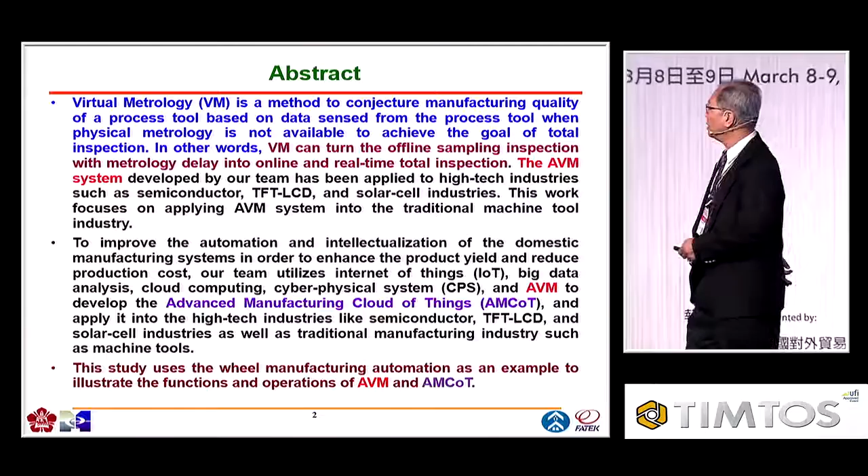I'll show you what I call Industry 4.1, not just 4.0, because we emphasize not only increasing productivity, but also quality. I will show this later. This study uses wheel manufacturing automation as an example to illustrate the functions and operations of AVM and AMCOT. So what is virtual metrology?

From this picture, we can show that VM is a method to conjecture manufacturing quality of a process tool based on data sensed from the process tools, without physical metrology operation. Why do I say so? When we have machine tools and try to machine a workpiece, after finishing the machining, if we would like to know the quality of this workpiece, conventionally we need to ship it to off-machine metrology equipment, for example CMM equipment, to try to measure it.

But this kind of measurement is very time tedious, it takes a lot of time. So conventionally we can only use sampling inspection. Not only sampling inspection, but also metrology delay, because after finishing the machining you need to ship it to the measurement equipment, and the measurement itself still takes time. So this is what we call sampling inspection with metrology delay, and this is not desirable.

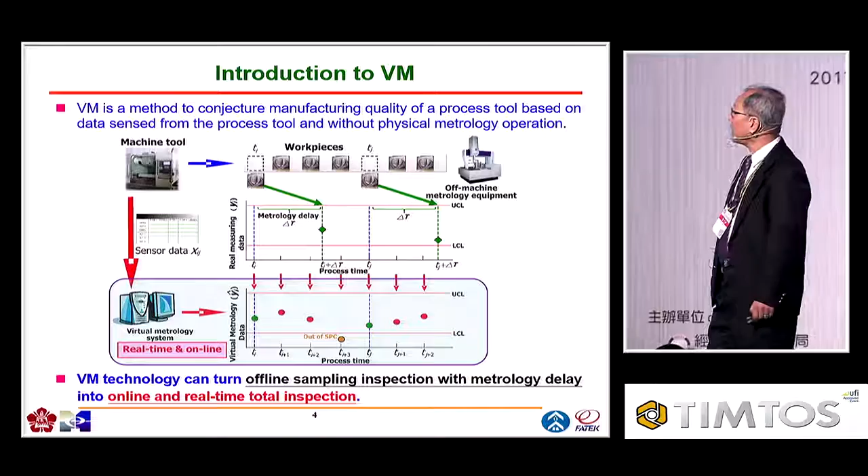Allow me to show you the AVM system. I had this kind of demo 4 years ago, almost 5. We had this demo at, for example, TSMC and UMC, etc. But for the semiconductor industry, they wouldn't allow me to take a picture or even video of that. But the CNC machine industry, they allowed me to do so.

So about 4 or 5 years ago, I showed this at the 2012 Taiwan International Machine Tool Exhibition in Taichung and also in Taipei. So what I really would like to show is the concept of AVM.

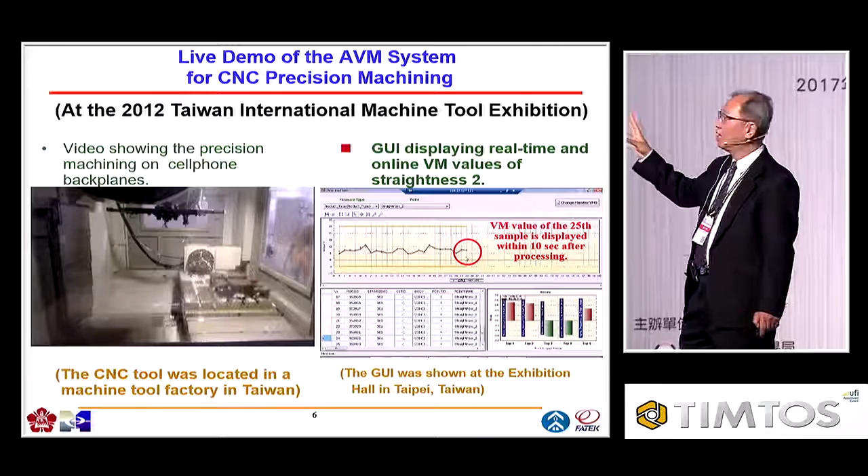So this is the concept of virtual metrology. Actually, this is the very first demonstration around the world of how to demo the virtual metrology technology here. So what is the AVM technology?

Let me show you the traditional VM scheme. What I mentioned is that we need process data. In semiconductor manufacturing, the production equipment has all kinds of sensors, and they already collect all that data in a database. So we can collect all those sensor data from the database easily.

But for CNC machines, most don't have sensors installed yet. Of course, we can install them ourselves. So we have a cooperation with FEMCO, and right now their product always has all the necessary sensors embedded in it. So we can collect the sensor data from the equipment.

Using this process data, if we have virtual metrology models here, then we can get the prediction easily. But we still need this kind of metrology data, the sampling output, because this sampling data is only for training and tuning.

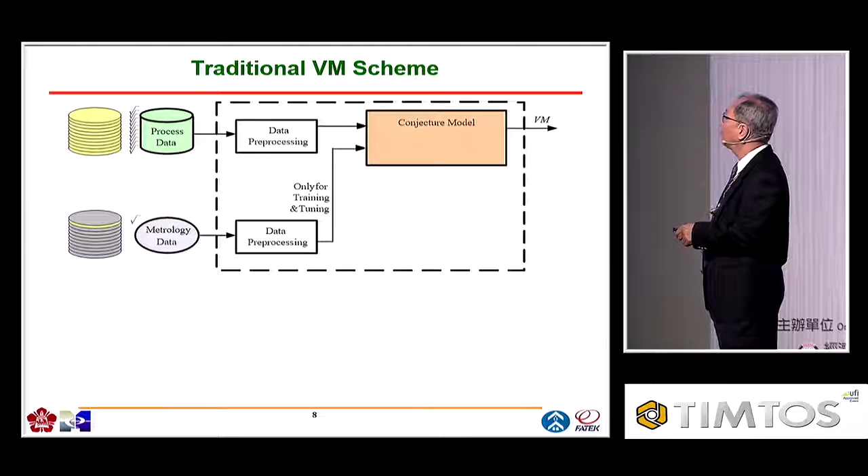Because the equipment itself is a time-varying system, you need to know the status of your equipment. So we still need some kind of sampling metrology data for tuning and training. But this is the basic requirement.

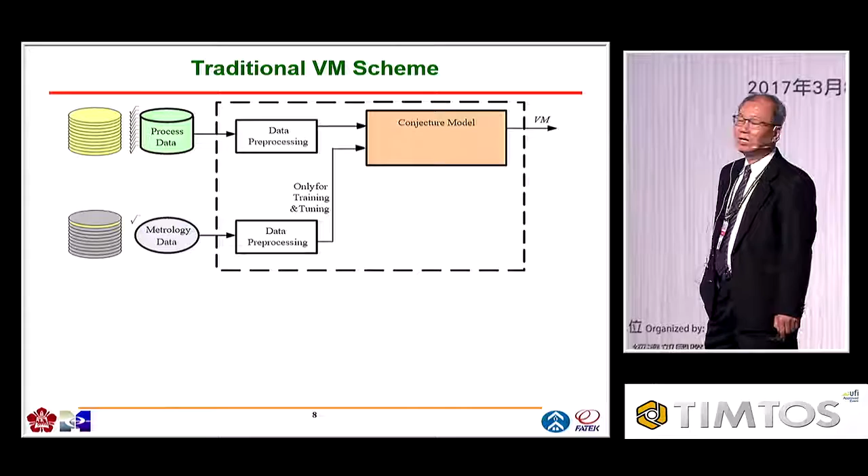Anyhow, this kind of algorithm was proposed about 10 years ago, but no one could really use it. Why? Because first, this is some kind of prediction, but they don't give you any kind of reliance index, so you don't know how good it is. So they are hesitating to use it.

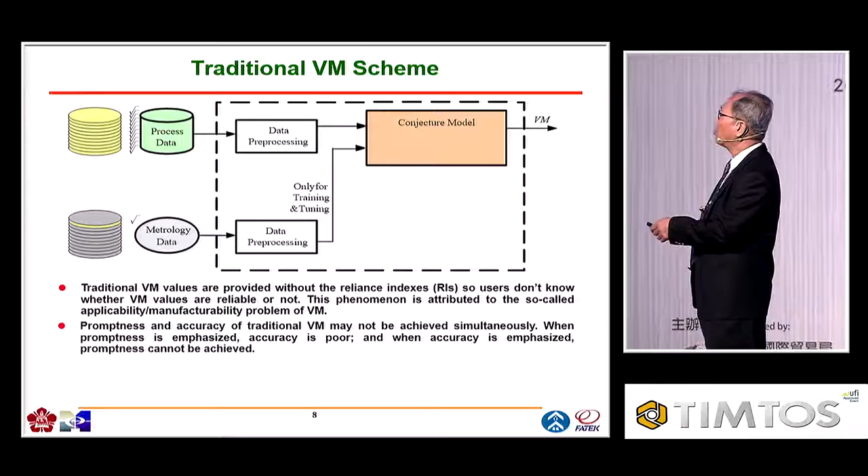The second question is, as we already told you, what we try to have in virtual metrology, we need to consider promptness and accuracy. For promptness, after we collect all the process data, we can predict it within about 10 seconds.

But because the equipment itself is a time-varying system, if the equipment state has changed, you need to refresh the model. So this kind of accuracy, we need to take care of also. Those two things conflict with each other, and we need to take care of promptness and accuracy simultaneously. This is another big problem.

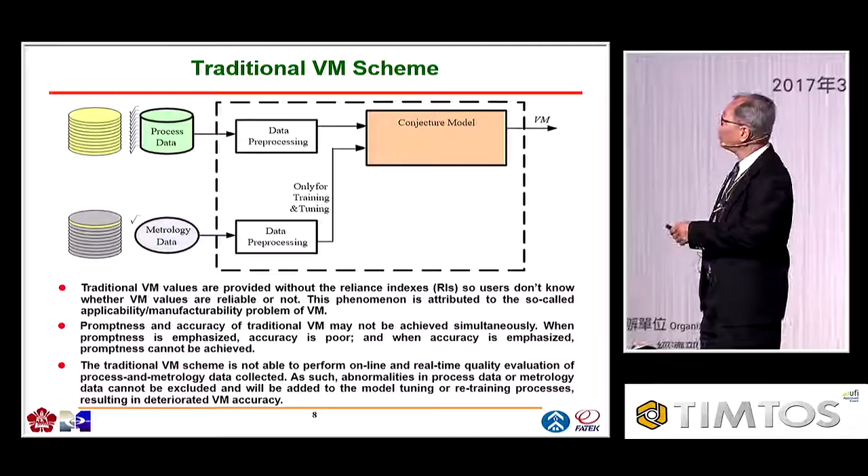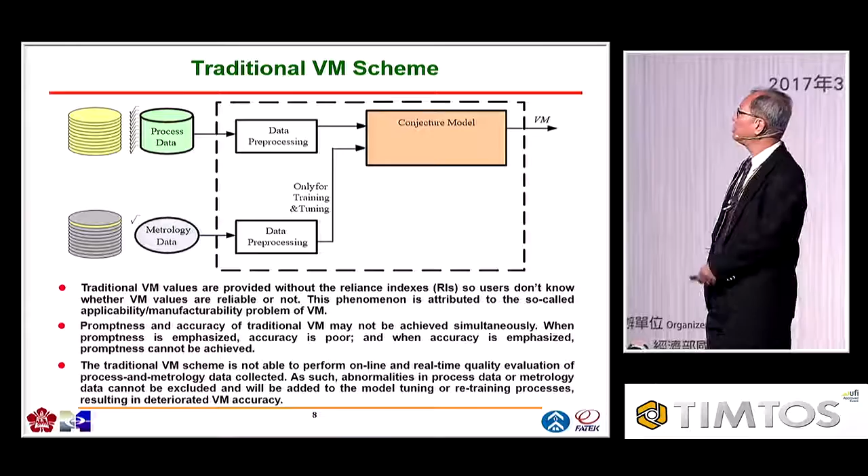And others—in the traditional VM scheme, when we do this kind of data mining or big data analysis, the data quality itself is very important. But traditionally, they didn't know how to do the data quality check in real time. So that is another big issue we need to take care of.

So what I propose is this algorithm that I invented. To begin with, we generate an accompanying reliance index and global similarity index, so that we not only provide the virtual metrology value but also the reliance index. So you know how good it is, and users can use it with confidence.

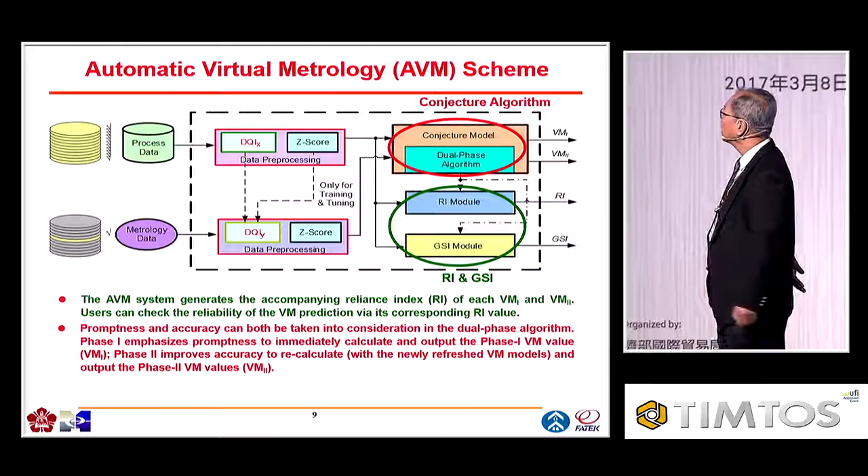The second one is a dual phase algorithm, so promptness and accuracy can both be taken care of. Phase one emphasizes promptness, and phase two improves accuracy. The last one is data quality evaluation, so the AVM system can evaluate the quality of the process and metrology data online and in real time, so the output of the VM value can be further assured.

So not only those features, but also we can check here. This red dot is the actual metrology, and we have two prediction algorithms.

The black curve is the neural networks, and the blue one is PLS. You see, if those two are about the same, we have confidence in all the results.

But for this point, what I told you about the reliance index, we just check that there is an abnormality detected online. Then an alarm can be sent too. So this is one of the advantages of AVM, in addition to total inspection.

In other words, when the system is smooth, when the machine itself is very stable, then the accuracy is about the same as what you really get using real metrology. But when the machine itself has something wrong, we can still detect it.

The prediction here is no good, don't use it. Actually, this is the real situation of what I demoed in the picture. And why do we have this kind of situation?

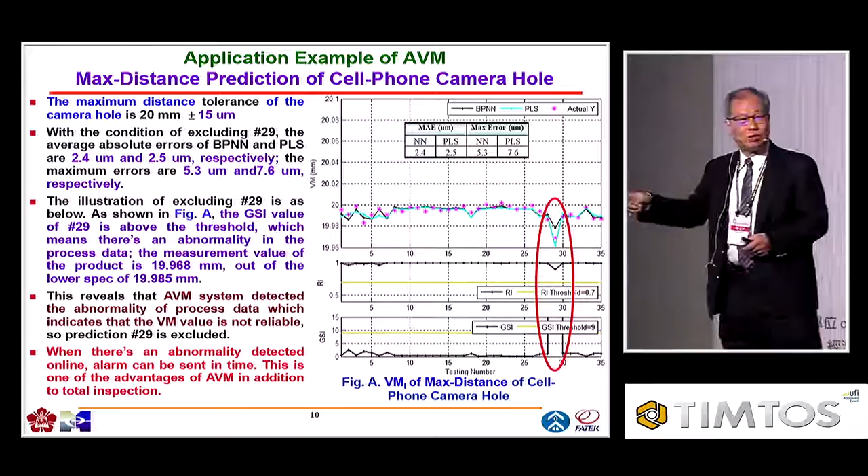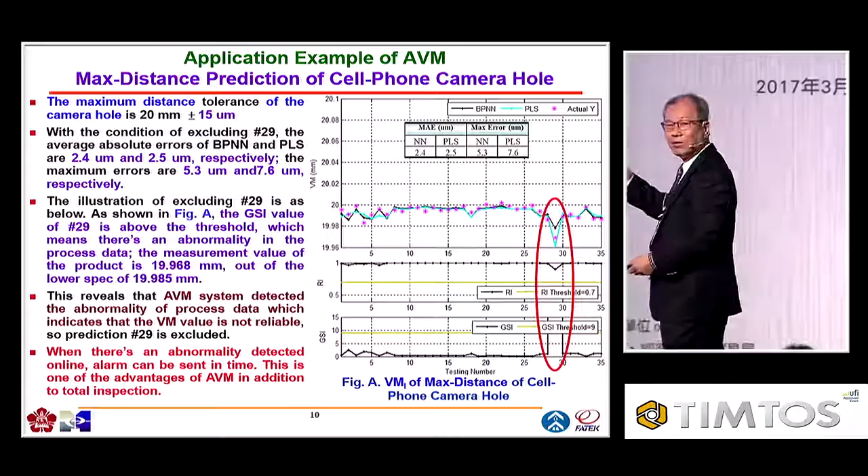Because when you clamp it, when you use a fixture to fix it for machining, at that time the fixture is not very fixed. There's something wrong there, so the vibration signal is different. So we can detect this kind of signal and see that this prediction is no good.

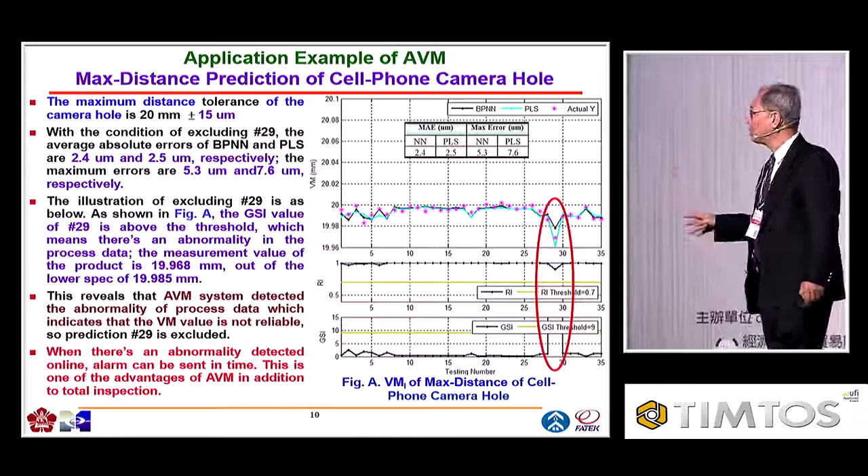Actually, when we really go to real metrology, you see we have a difference there. So this is one of the features that the AVM system has.

So we give you the example for FEMCO and FATEK. What I show you here, you can see the real demo this afternoon. You can go to the booth at 3:30 and see everything. But I just try to present what we will show in the afternoon here.

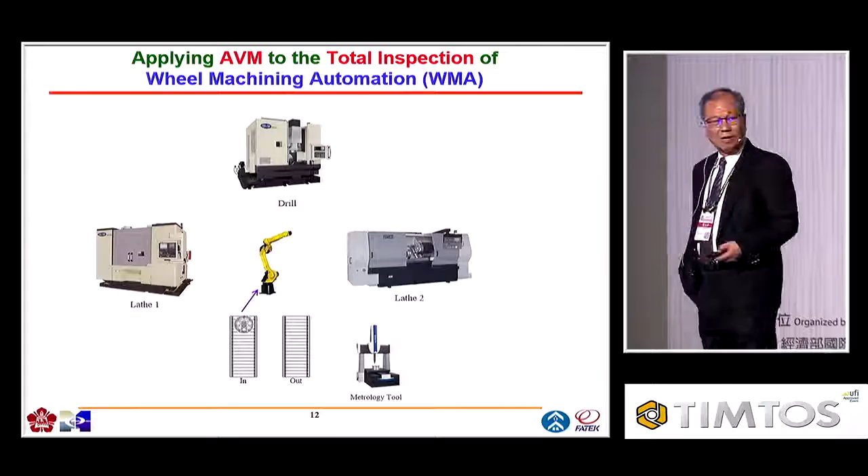For this turnkey solution, this wheel machining automation, we have two lathes and one drill machine. Conventionally, when we have a wheel, we bring it to the lathe for machining one side. Because the central hole diameter is a critical dimension, we need total inspection of that. Then we machine the other side and drill the holes, or something like that.

After that, we finish the operation. But we have so many quality items that need to be inspected, and here they can only measure the central hole. If you would like to know all the quality values, you need to ship this to a CMM machine for measurement.

And of course that is offline, and we have a metrology delay. We can only do sampling inspection, not total inspection. If we would really like to have total inspection of all of them in real time, how can we do it? This is the way to do it.

We need to install sensors, such as accelerometer, current sensor, etc. Then we collect all of the data through an IoT device called GED. This data is fed into the AVM system, which can conjecture all of the quality values in real time. I'll show you later.

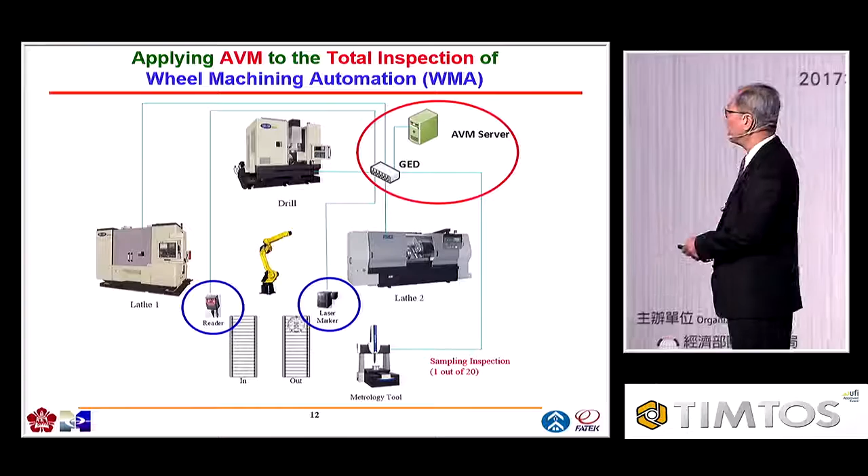For Industry 4.0, in order for this kind of system to work, we need to have a work-in-process tracking also. So we need a laser marker to mark an ID or QR code on the wheel, and we have a reader to read the ID. And we still need measurement equipment for sampling values, for tuning the model.

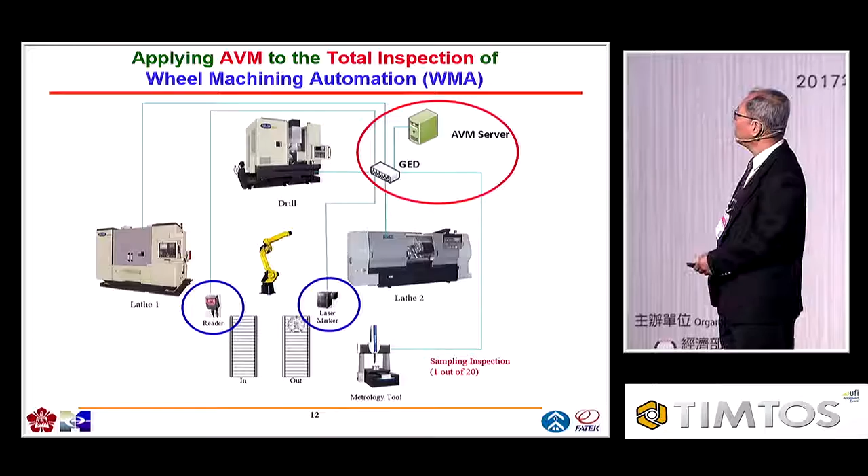For the block diagram, this is the machine itself. We will install the sensors on it, and we still collect the necessary data from the controller also. This is the data collection device.

Actually, this is one kind of IoT device. They collect not only the process data but also the metrology data, and then feed it into the AVM server.

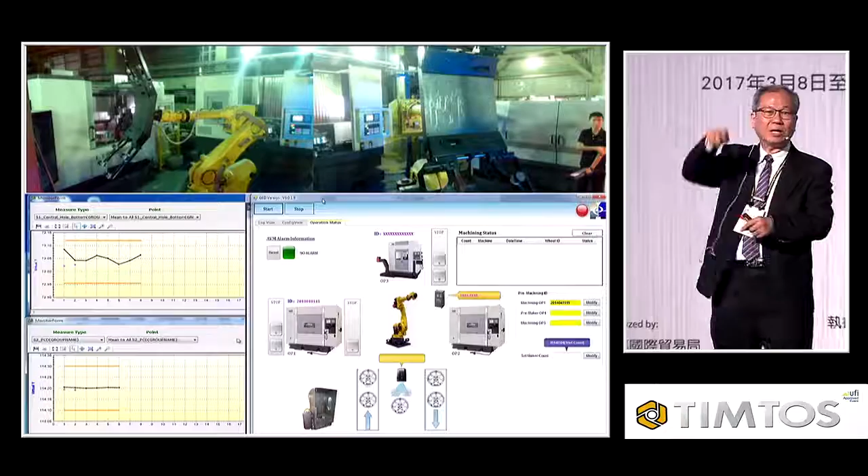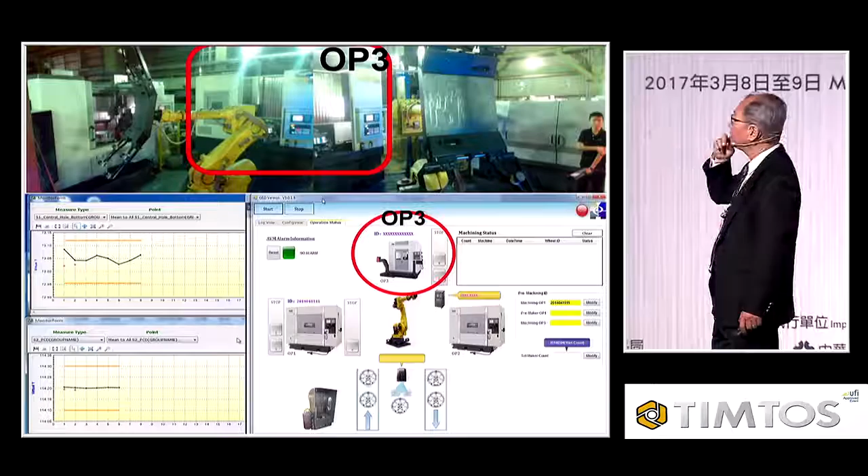This film was taken two years ago in Jiayi, but the whole turnkey set has been shipped to Nangang. You can see all the operations in the afternoon. We have OP1, that is this machine, and OP3 - I will demo those two - that is the drill machine. We have a Fanuc robot, and we will show you the VM result.

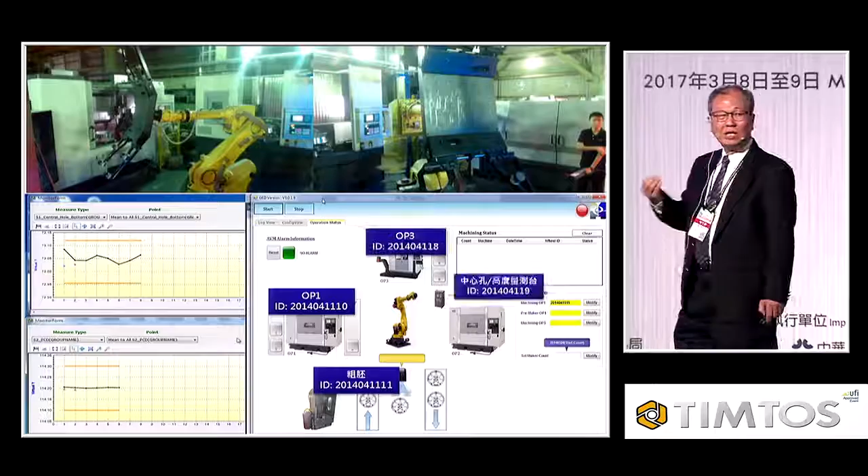So this is the GED client. We need to do tracking, so you see we have, for example, this number 7, 8, 9, 10, etc. So we will show you.

Okay, no sound. I need sound.

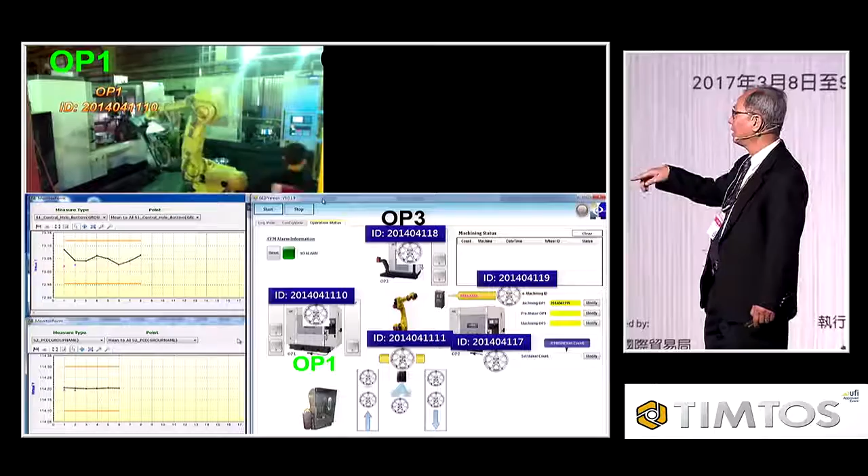Oh yeah, okay, so you see, so because they need to clean it. So after cleaning, then he will put number 11 into the machine, the OP1.

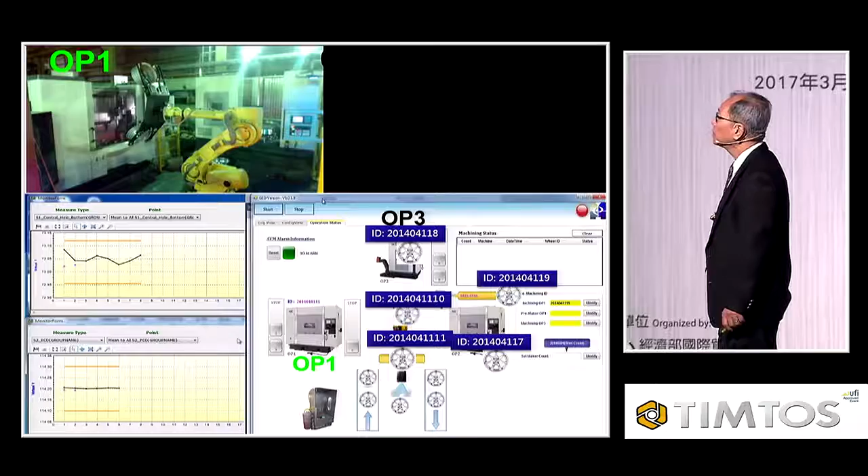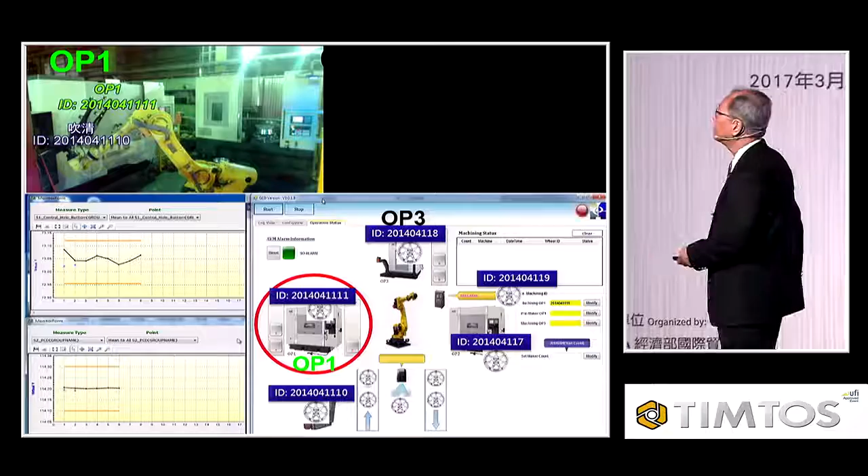Okay, so when you put OP1 in, when he closes the door, the drill machine starts operating. And you see, okay, so it starts operation. And you see, this tries to collect all the data.

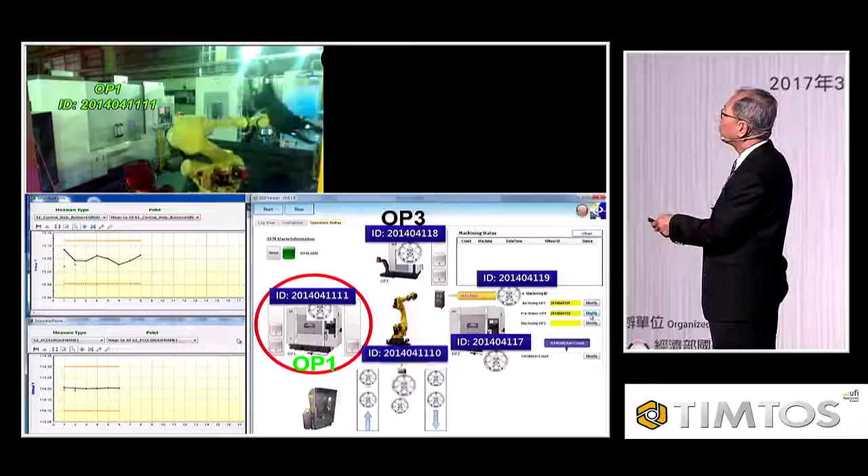But after finishing the first operation, then he needs to use the laser marker to mark it. So you see, so that we have a laser ID there. But when we show you that after finishing the machining here, actually we have 3 quality items shown: central hole, outer diameter, and flatness.

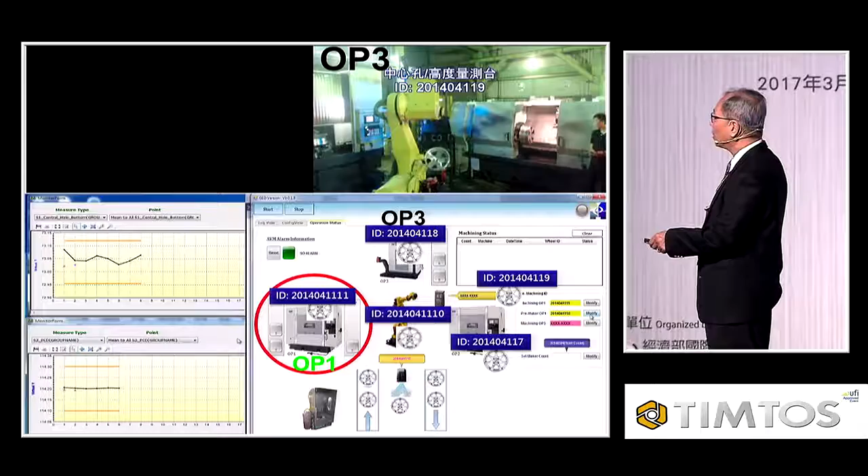After finishing this one, we will show you that he will predict the output. Would you please turn the volume a little bit down? Okay, so not only the OP1, but also OP3 and OP2 too.

And because we have the ID already, before entering the machine, we need to identify which wheel has been shipped to the CNC tools for machining. So you see, be careful here. It's about done. After finishing this one, we can predict the value here.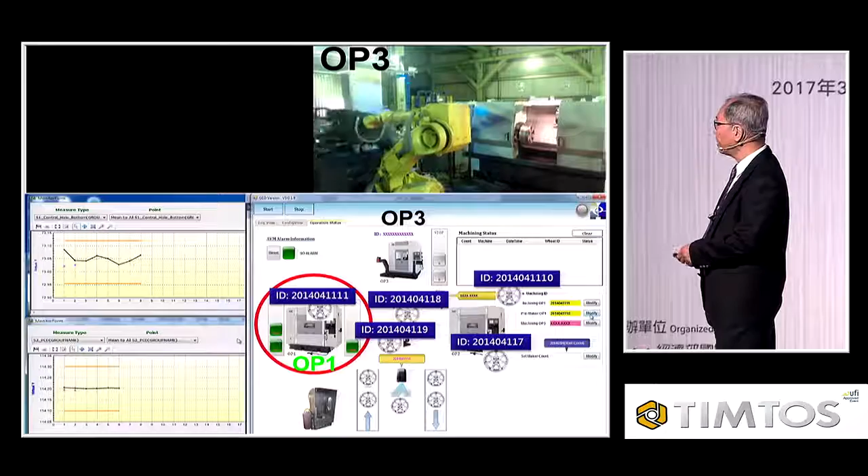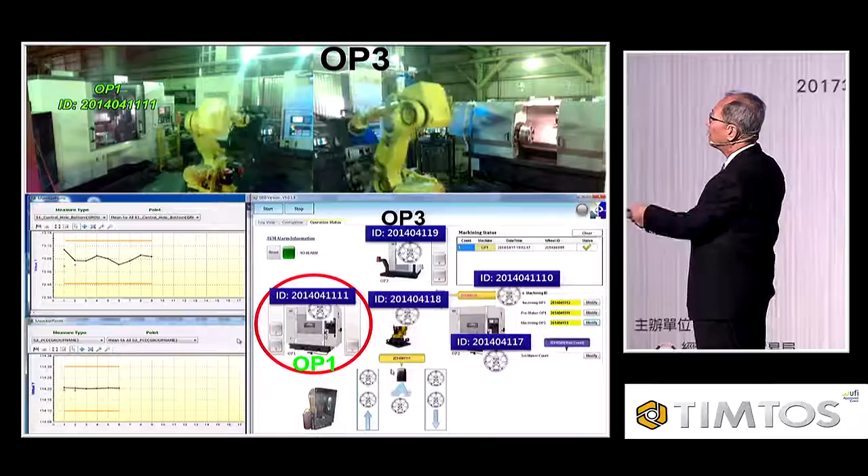Okay, count 1, 2, 3. So we have predicted the value, and you see, then the door opens. So even before the door completely opens, the quality has been predicted.

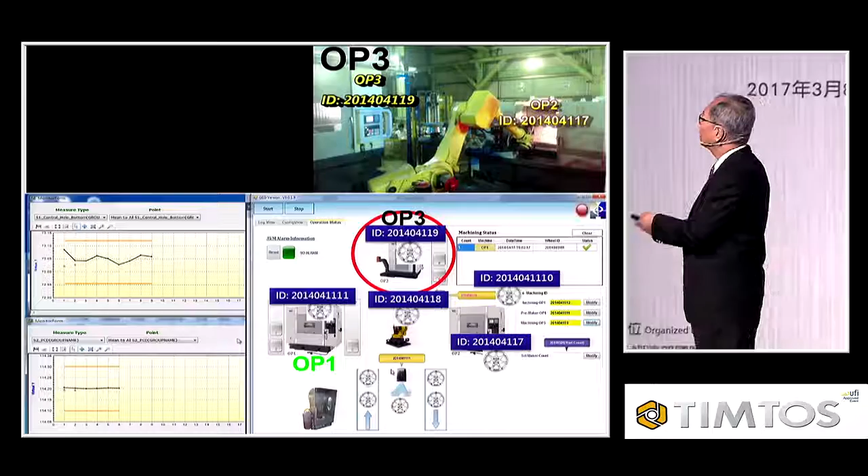So by the same token, not only OP1, but also OP2 and OP3, after finishing it, we can predict the quality in real time. So you see, after finishing all of the operations, he can get all the quality data.

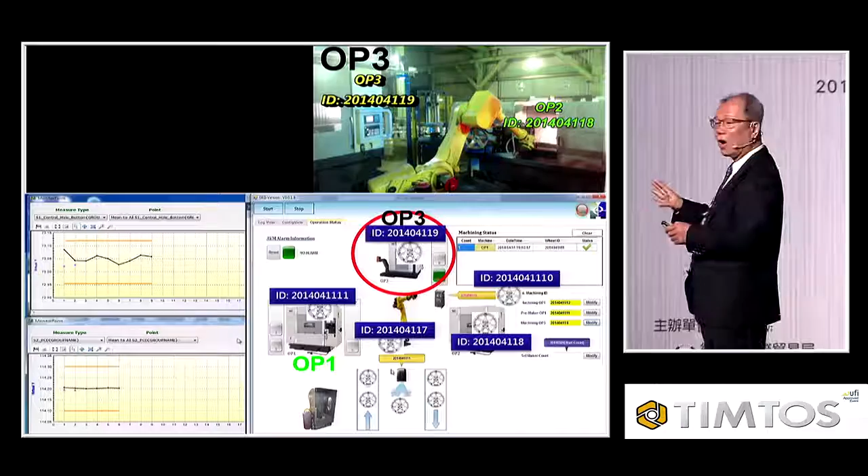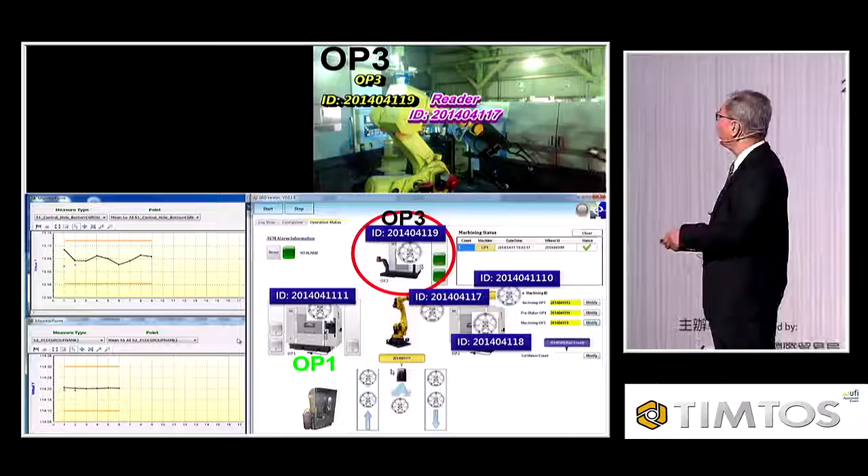And all those quality data, you can correlate together and convert into a QR code. And we can use the laser marker to engrave all of the QR code onto the wheel.

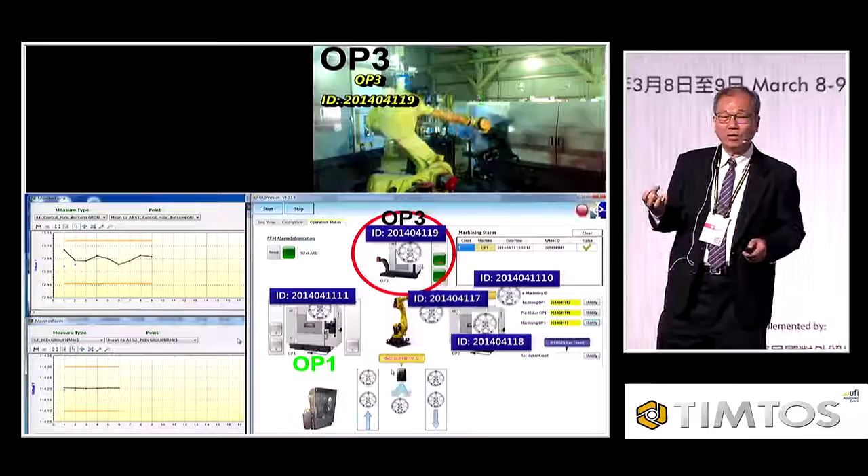So you see, this is one of the requirements of Industry 4.0, because on the product, show you here, you see outer diameter, flatness, etc. Those quality values can be engraved on the wheel itself.

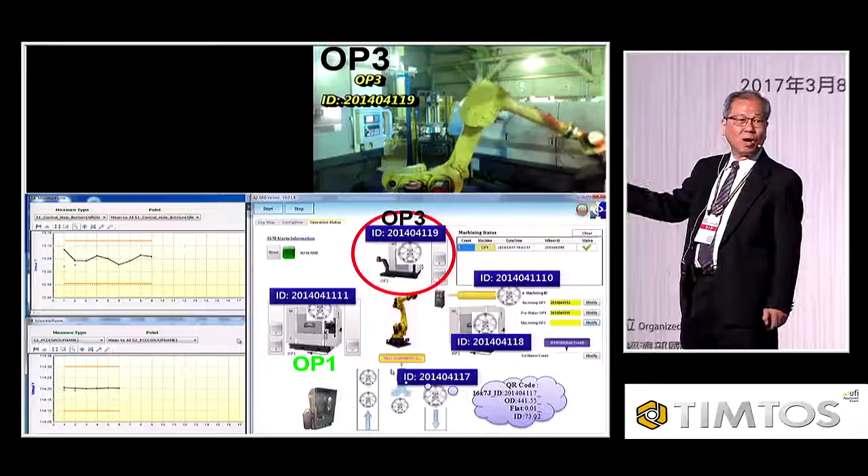So you see, each wheel has its own quality value on it. So if you really would like to know the quality of that, you just use the laser reader to scan it, and you know how good it is.

So you see, this is what we call it. This is actually a miniature realization of Industry 4.0. And not only Industry 4.0, I will give you the concept of Industry 4.1, because Germany invented or proposed Industry 4.0.

But what they really would like to promote, they just emphasize how to increase productivity. So that is very good. But you see, they didn't say how to enhance, how to increase the quality.

Why? Just because they don't say how, they don't know how to do total inspection. Because if you really would like to increase the quality, you need to do total inspection in order to have zero defect.

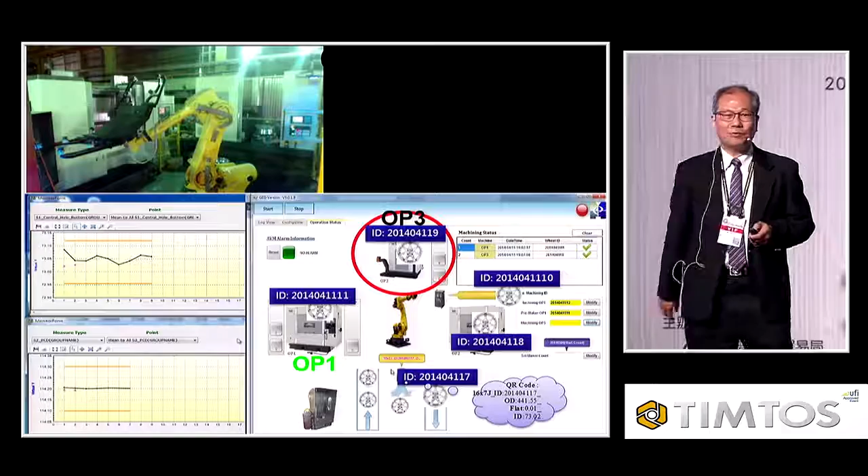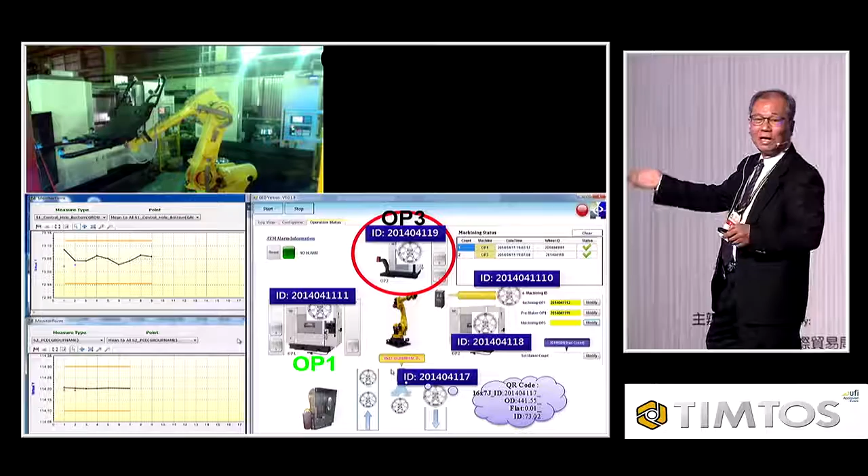But they didn't define how to do it in Industry 4.0. So that is the key reason I propose Industry 4.1, because I can include the AVM system into Industry 4.0 to become Industry 4.1, and we can achieve the goal of zero defect. Then I'll come to that later. So you see, this will be the result.

So then the cyber-physical system, the AMCoT, okay. And you see, what we really would like to do is try to let these GED functions become an IoT component.

So you see, actually we have a patent on this too. We have Taiwan, US, and Japan patents, because our IoT device should have smart applications. So then how do we do the smart application?

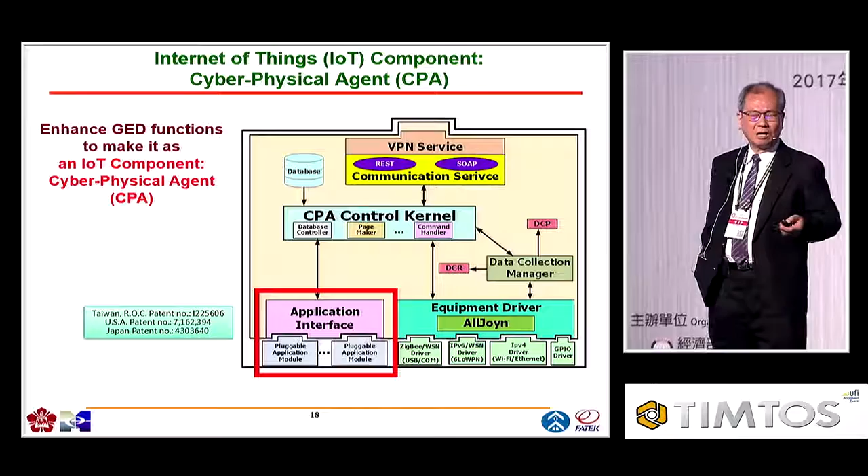This is a pluggable application. You can just press this, something like an APP, just download the APP, plug it in, and you can have various kinds of applications you want. For example, you can have predictive maintenance modules, etc.

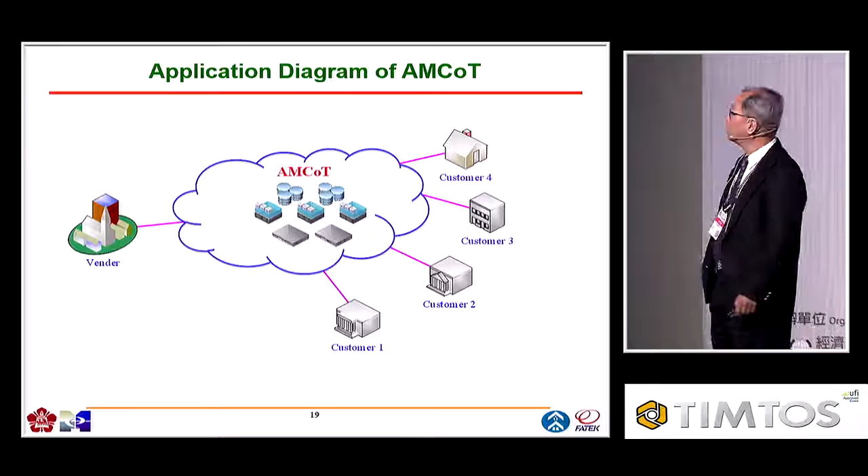So you see, this is the proposal that we prepared for FEMCO. This is the vendor, okay, and those are the customers, and we have a private cloud there. So you see the system here, this is the vendor, this is one of the customers.

So you see, the AVM system, we can move the AVM into the cloud. So you see, because after finishing the modeling here, we know we can install or upload the models in the cloud.

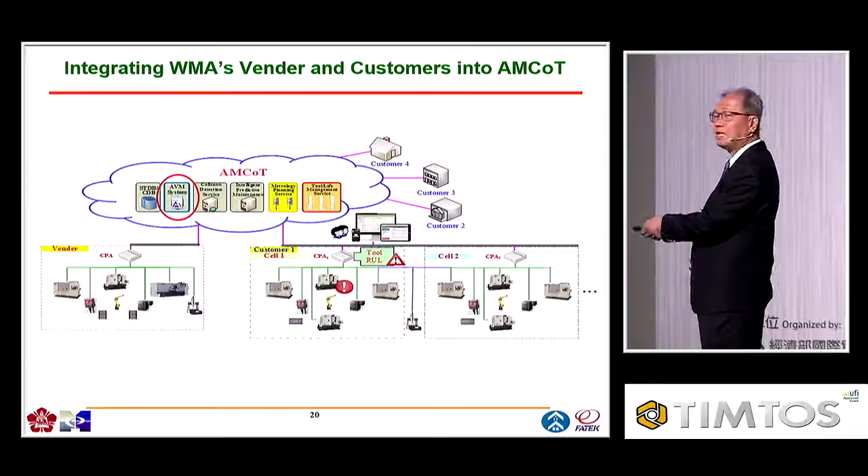And then the customer just pays by use, of course, because those turnkey machines were provided by the vendor. So the vendor knows what kind of type they have, and they can download the VM models from the cloud. After downloading it, they can use these models contextually. Now I'll show you this later.

So as I said, the AVM server originally is just beside the production line, but we can move them to the cloud.

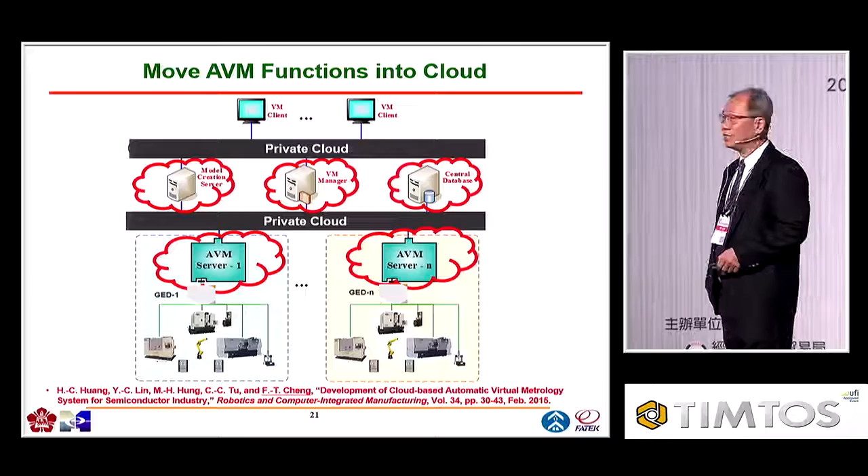Actually, I have already got this kind of technology and used it in the semiconductor industry. The same technology can be used for the machinery industry also.

So the application example, AMCoT, is what we have as an industry and university cooperation project with FEMCO and FATEK.

When we had this kind of technology used in machinery industry, we demoed it in April 2015. At that time, one of FATEK's customers saw the demo video I just showed you, and they were impressed, and invited us to mainland China to test whether the system is good for mass production or not.

So we just tried to prove that AVM models constructed in Chia-Yi, Taiwan, can also be reused on the same type of tools on the production line in China.

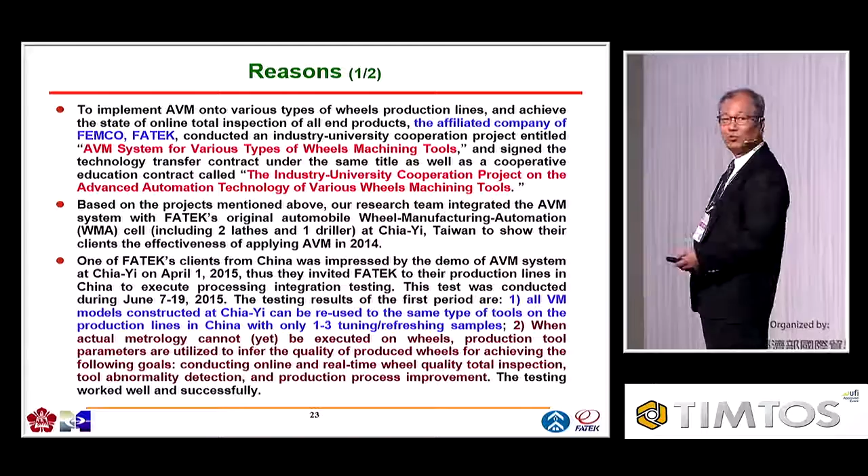Using just 1 to 3 samples, we can use it, and we can use the same model in mainland China. We had 3 periods for testing.

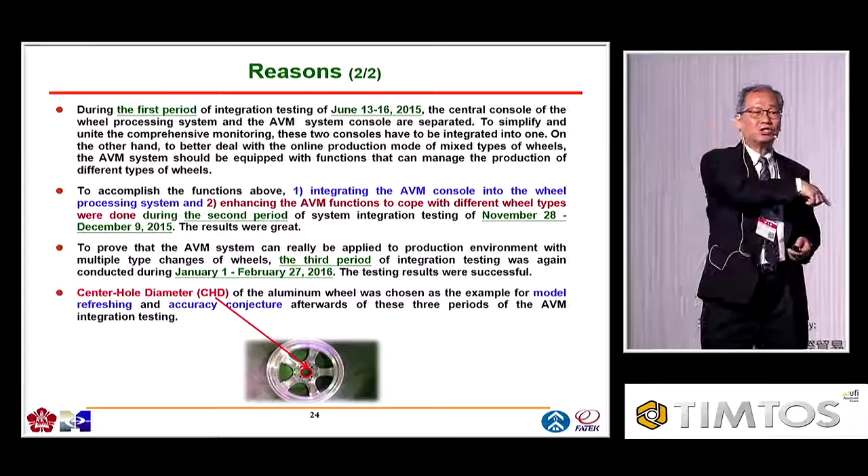So the very first one just checked that the model built in Taiwan can be reused in China also. The second one, we tried to combine the consoles.

I'll show you later, because we have a processing console and an AVM console, but we need to combine them together within a single console. That is easier for manufacturing and for shop floor control.

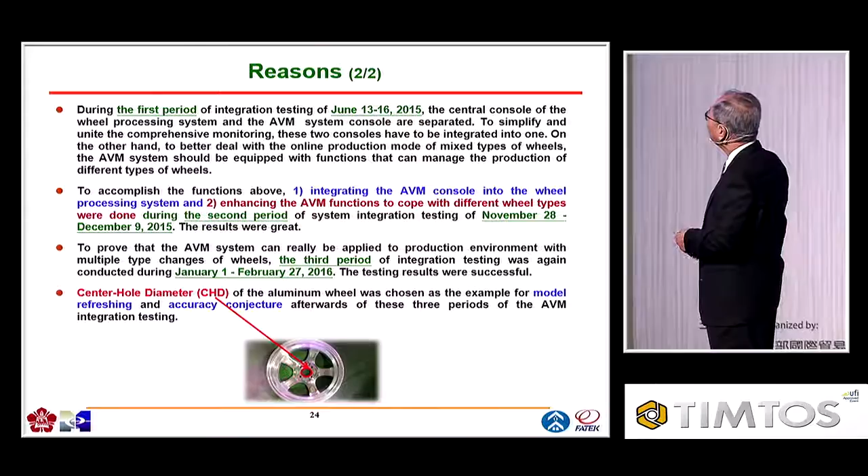The second thing we need to do is meet the requirements of mass customization. In other words, we need to cope with different wheel types. So I'll show you how to do it.

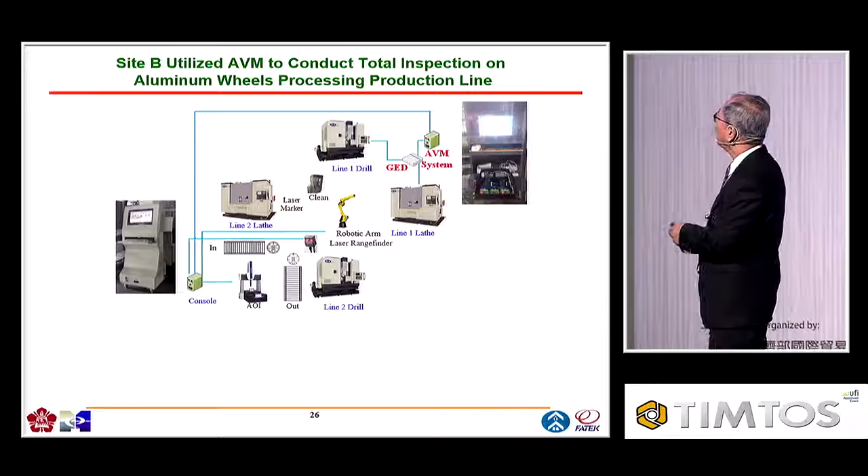So let me show you the experiment. The very first period had 2 lines combined together, a drill machine and a lathe machine. Originally they had a wheel process console here, but the AVM console was separate. We just proved that the AVM technology can be used in it.

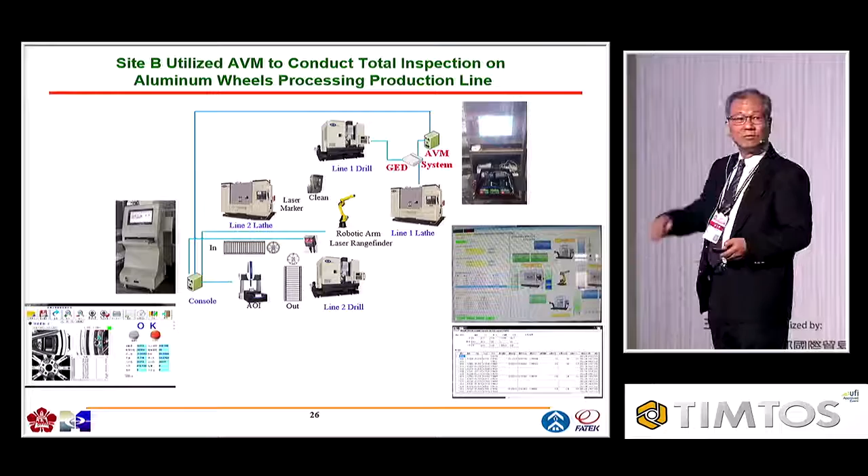That was the very first period, and of course that was a success. In the second phase, we will merge these consoles into one.

After 3 periods of testing, the quality, according to the accuracy table shown here, under the condition of stable automatic wheel processing, the average absolute error is just within 0.01 millimeter. So the customer is very satisfied.

They like this very much. In other words, the quality of the measurement of virtual metrology is about the same as physical measurement.

Let me show you this one, because this is what we call cyber-physical interaction. The AVM system, because it's on cloud, is one kind of cyber system, and the machine tool itself is a physical object.

So this site A was conducted in Taiwan, in order to verify that the quality of the virtual metrology is about the same as the real metrology.

The red dot is the real metrology value, and the black curve is the virtual metrology. So it's about the same.

But when the customer watched the demo in April 2015, they liked this one very much, so we shipped to China and installed the system there.

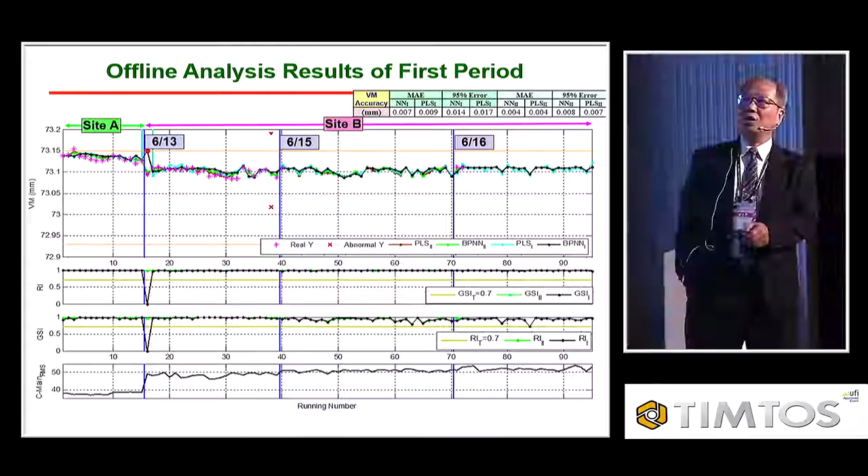So for the very first one we have a red dot here. The reliance index and global similarity index showed it wasn't good, because we detected that the modeling couldn't cope with conditions in China for the very first one.

So we informed the physical object to try to do real measurement, because we need to get this value for tuning the model, so that this model can be rebuilt to take care of what we have in China.

After rebuilding and tuning this model into the virtual metrology system, we can check that the prediction and the actual value are about the same.

After that, we really can do operations on the real production line, needing only 1 to 2 measurements.

All the others is just free run. The value I just said is the same as what we have. If you really try to bring it to the physical measurement, the value will be the same. We just check that the accuracy of them are correct.

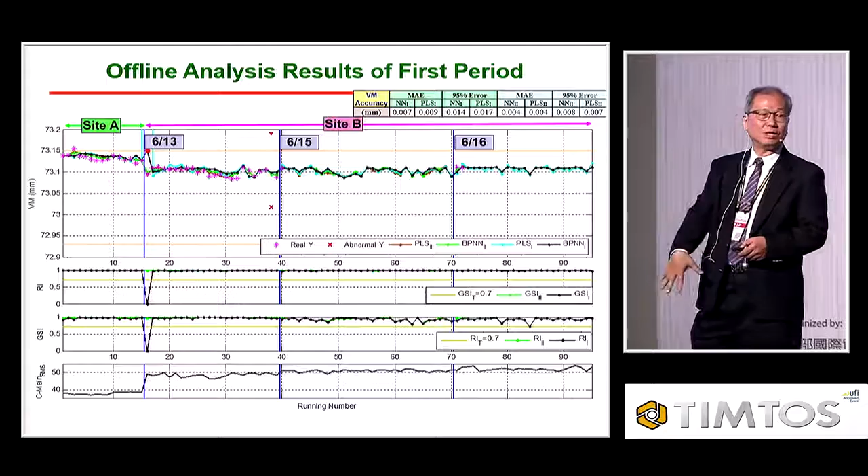So actually what we have, this operation is what we call cyber-physical interaction. The cyber system is the AVM, and the physical object is the machine. So the cyber system detects that the physical object has something wrong there, and we need to recalibrate the model. So this is cyber-physical interaction.

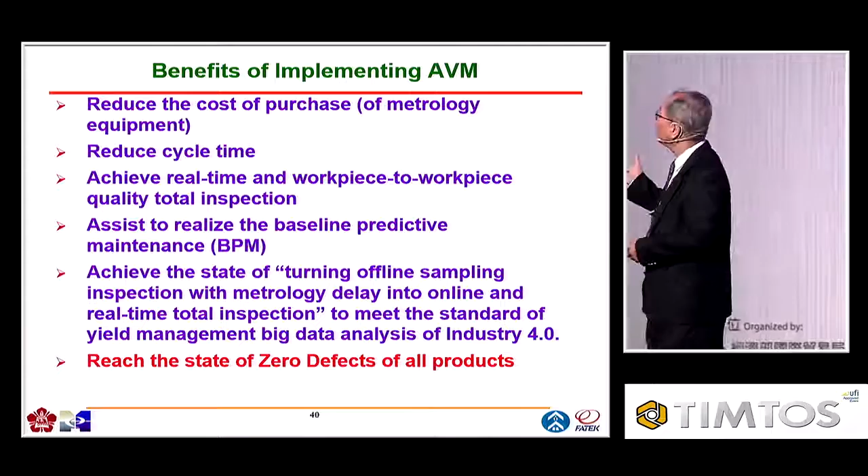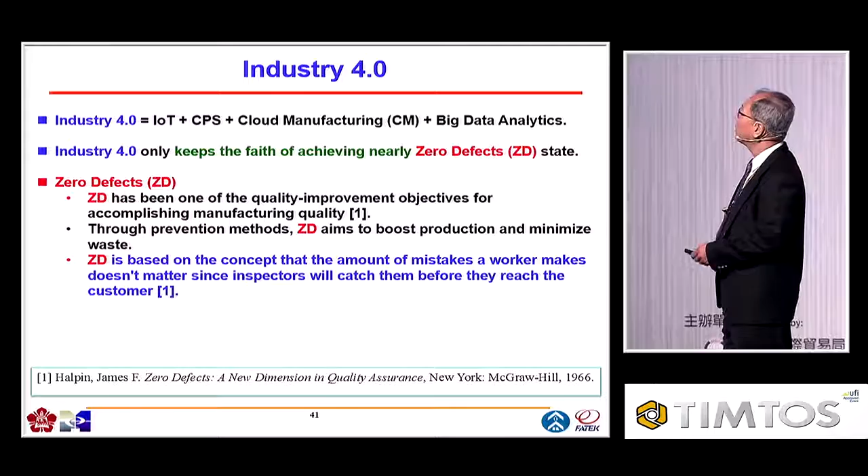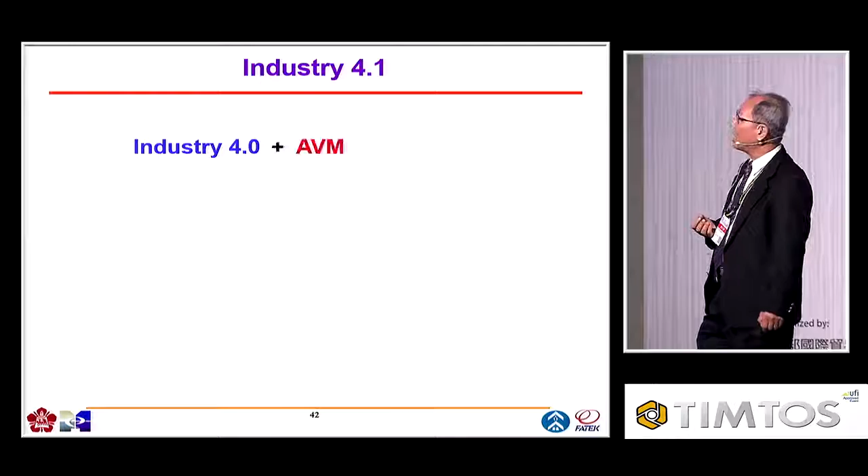The benefits of AVM, as you know, we can reduce the purchase of metrology equipment, reduce cycle time, etc. This is what I told you about Industry 4.0, because Industry 4.0 just emphasizes productivity. They didn't mention how to enhance the quality. But I know how to do total inspection, and Industry 4.0 didn't define that. So I just add AVM into Industry 4.0, and it becomes Industry 4.1. So this is how we can achieve the goal of zero defects.

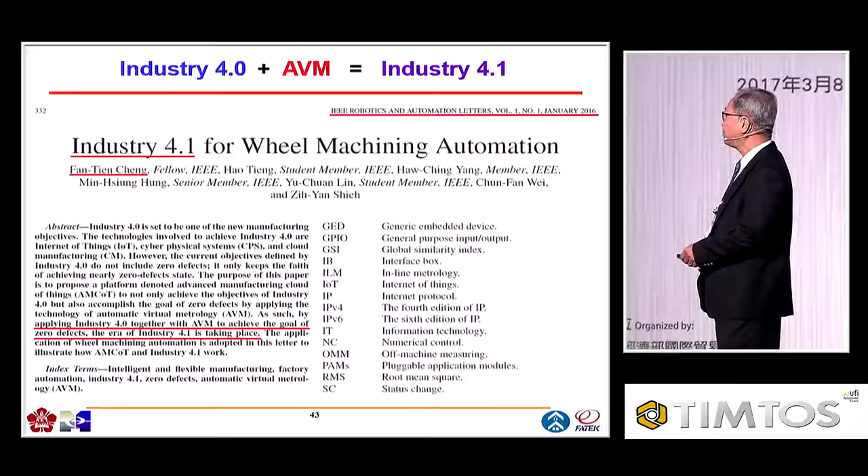So you see, this is stage 1. We can have stage 1 and stage 2, but they said time is up, so I'm sorry I don't have that much time to explain this in detail. Anyhow, this Industry 4.1 concept is in an IEEE paper. Applying Industry 4.0 together with AVM to achieve the goal of zero defects, the era of Industry 4.1 is taking place. These are the selected papers and patents.

Thank you. Since I don't have that much time left, if you can allow me about 3 to 5 minutes, I can show you...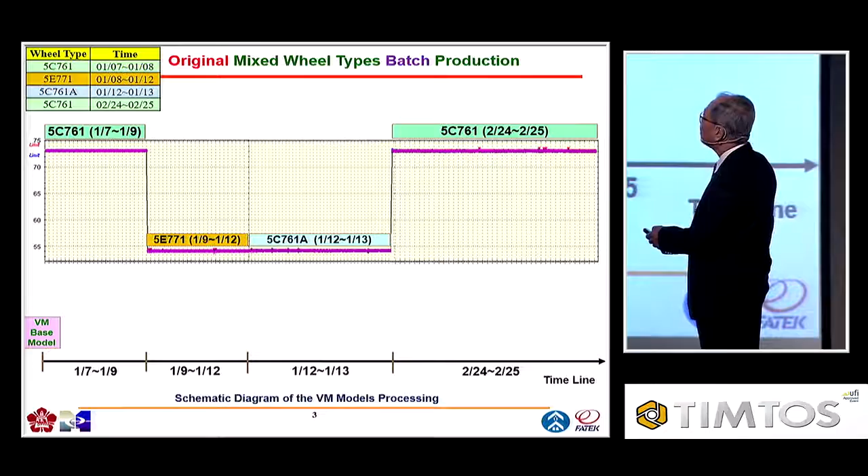How to have mixed wheel type continuous production results, the test result. Let me show you really quick. We have 3 types here: 61, 71, and 61A. We just try to merge them and give you the idea, because in the afternoon I will demo how to have mixed wheel production.

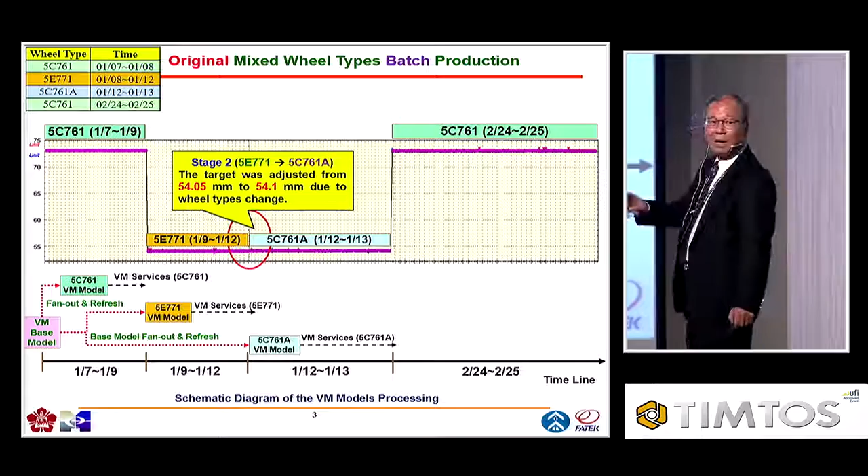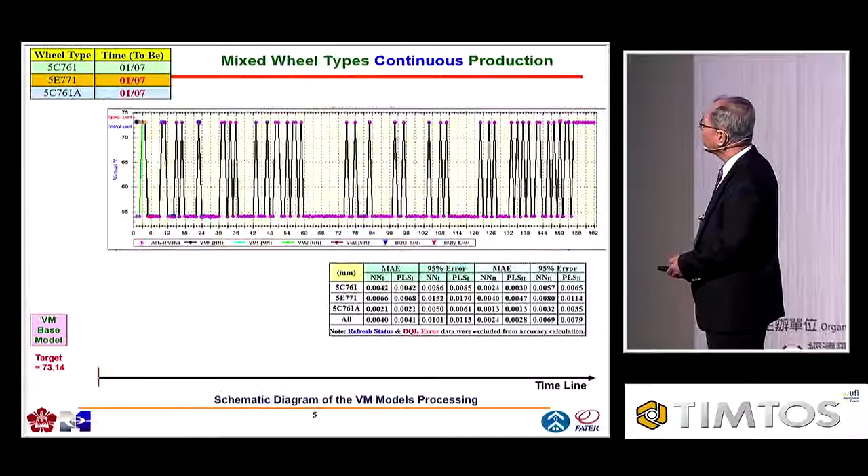So we have a baseline model here, and of course with 3 wheel types we need to have 3 models. Then if we shuffle them in here, this is the shuffle result. We have 3 different types simultaneously, shuffled randomly.

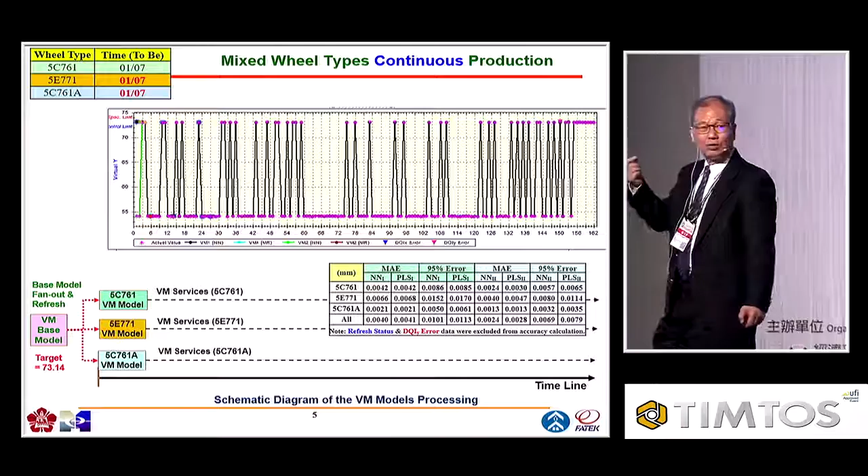So how can we take care of this? We need to have a base model, and we just need 1 to 3 wheels to refresh the model. Then it becomes 3 VM models for each particular wheel. After that, you can see the very first one uses the first model, the second one uses the second model, etc. So this will be the result.

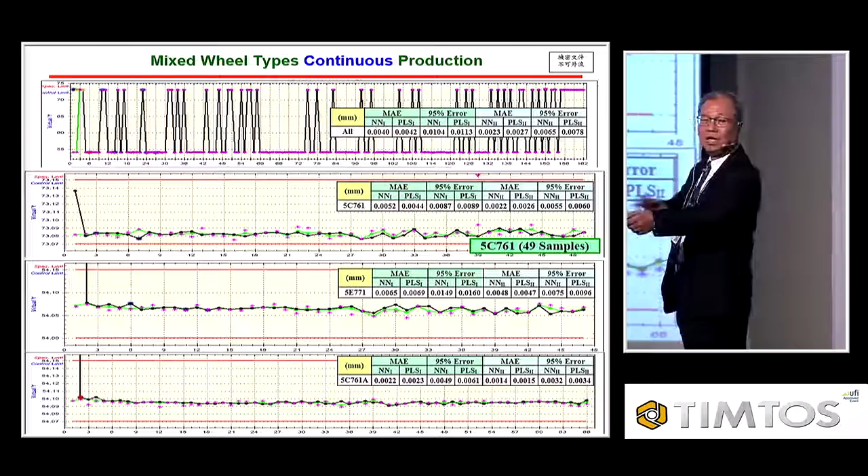And this is the combination. We can sort them into different categories, and the accuracy shows something like that. Let me show you what's going on here, try to zoom it in. You see, this is what I saw, this is the combination, and what you can see is something like that.

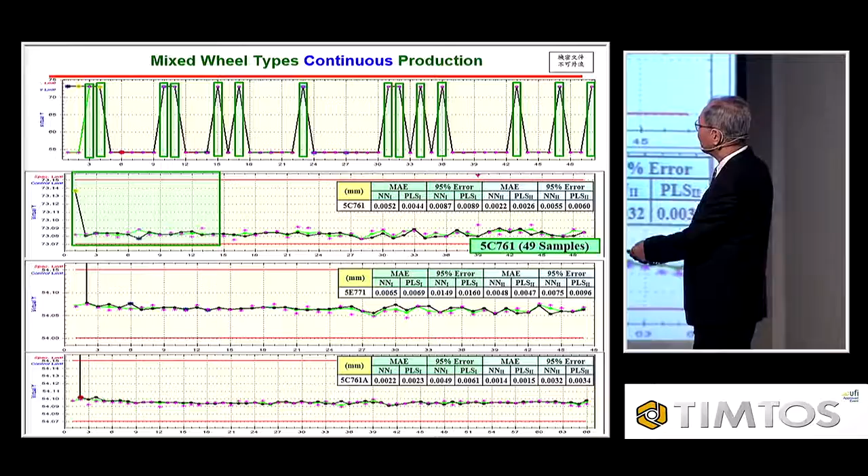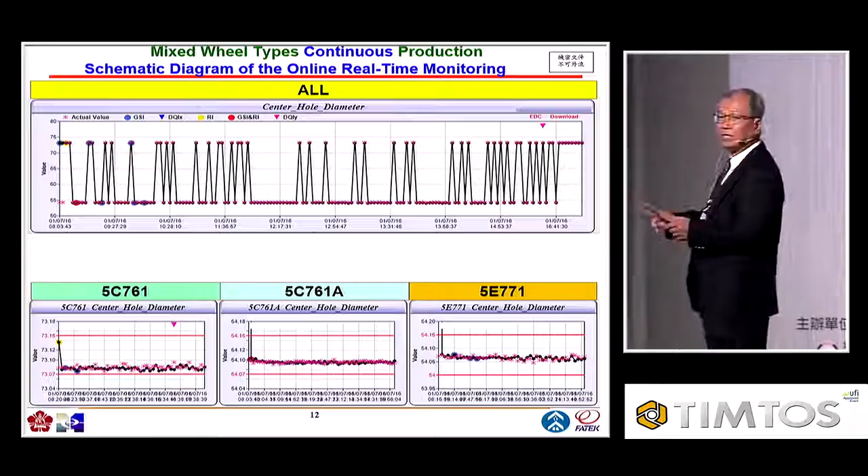Actually, we can sort them with software into 3 categories: the first wheel type is something like that, then the second and third. Because I don't have that much time to show you, in the afternoon we will show 2 different wheel types manufactured together, and demonstrate how this works. This demo just has 3 different types.

This is what we can see this afternoon, but since they said time is up, I don't have that much time to show you. This demo will take about 5 minutes.

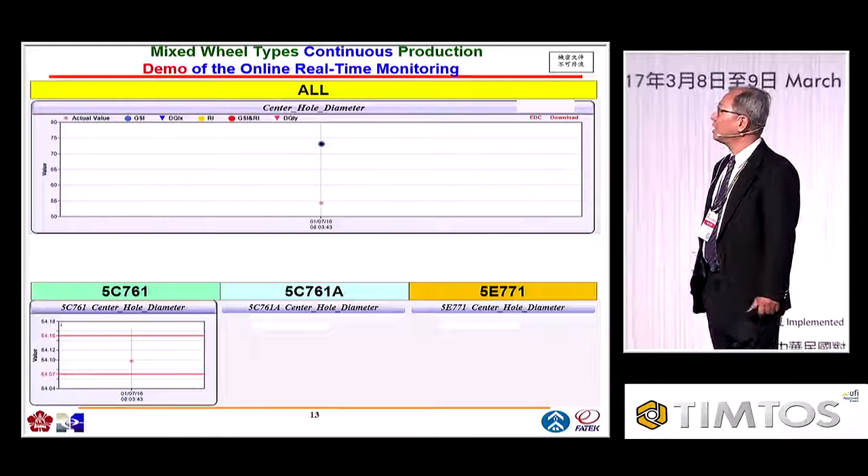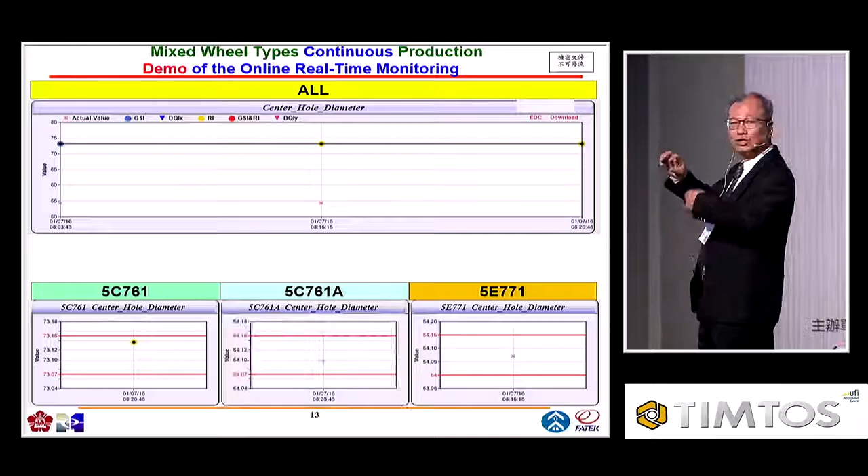But anyhow, just to give you the flavor: during the very first run, it will use 1 to 2 wheels to tune the model. After tuning the model, with 3 types here, you see the first one being corrected in the first wheel type, and this is the second and the third.

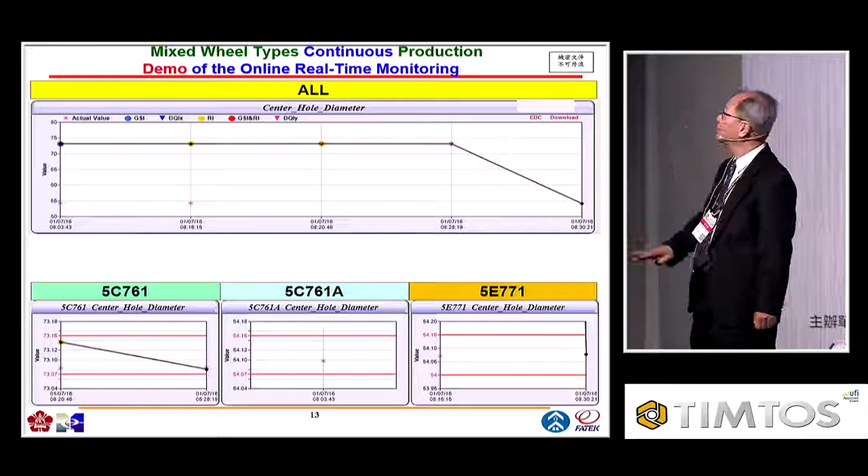So maybe just give me 30 seconds, let me show you a little bit. You see this one, this is that. So another one, but you see this one is here. Another one, this other type is here. And previously we just tried to refresh the model.

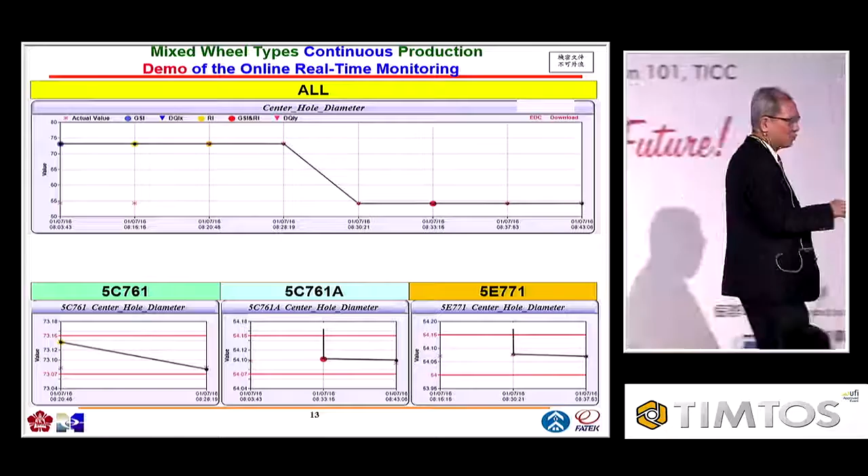Let me, because I don't want to occupy too much time from the others, so anyhow, I'm sorry. Eventually we will be something like that.

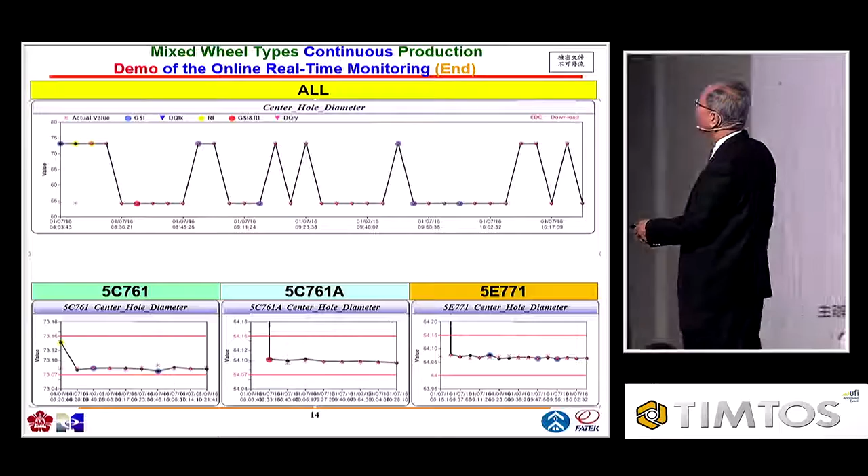After this is the combination, but we can sort them into 3 categories, and you will see this in the afternoon. I'm sorry to occupy so much of your time.